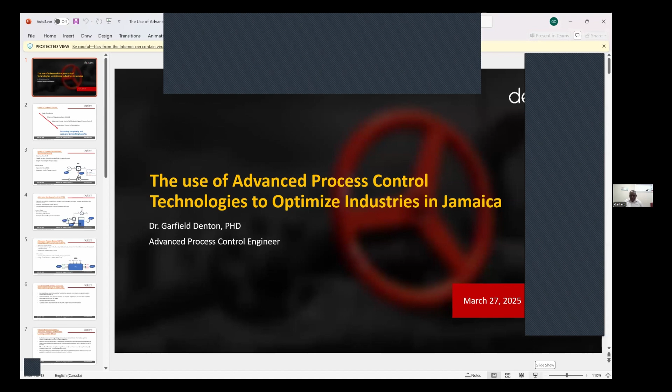Okay, so let me just share my screen. I sent a request to share. You have not been granted. Okay. Please let me know if you're able to see what I'm sharing. I am seeing. All right, thank you very much.

Yes, all right, so good morning, everyone. I'm really grateful for the opportunity to speak about the potential improvements we could see in our industries in Jamaica if we further optimize our operations utilizing advanced process control, or the layers of control above APCs.

The first thing I'll do is a quick review of the various levels of process control. It is important to understand that each subsequent level of process control is built on the layer below. The lowest level is our basic regulatory controllers. The next level is what we call our advanced regulatory controllers. Then we have APCs, and now we're moving towards constrained economic optimization. And then there's even another level above that, which will involve the use of AI and machine learning.

It should be noted that as we move up the levels, we're seeing increasing complexity, and the cost and benefits don't necessarily scale with going up each level. But the overall improvements we see in safety, stability, and financial results due to going up into the levels definitely improves. I will spend a few minutes just explaining what each level of process control gives us and what potential benefits we could get as we move up in the layers.

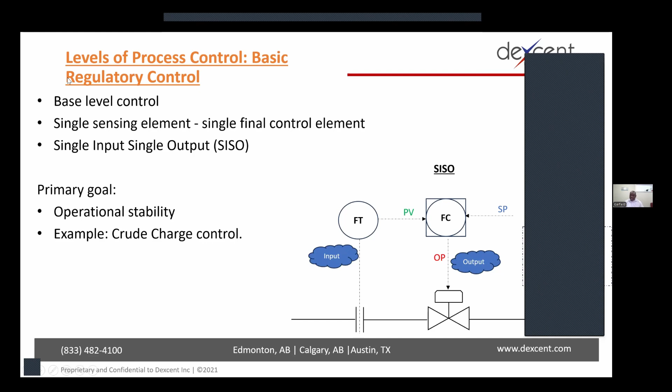The next layer is what we call our advanced regulatory controllers. These now have multiple inputs, but you still only manipulate one output device.

There are many different types of advanced regulatory controllers. We have ratio controllers, which are utilized quite a bit wherever we have mixing of chemicals, in the food industries, or making paint, or whatever the case might be, where you want to mix a number of ingredients. These advanced regulatory controllers gave us improved stability and performance over our basic controllers. Companies that have moved up from just basic regulatory controllers have seen improvements in their bottom line because of these controllers. Again, if the base level controllers aren't working well, then these ARC applications won't work properly.

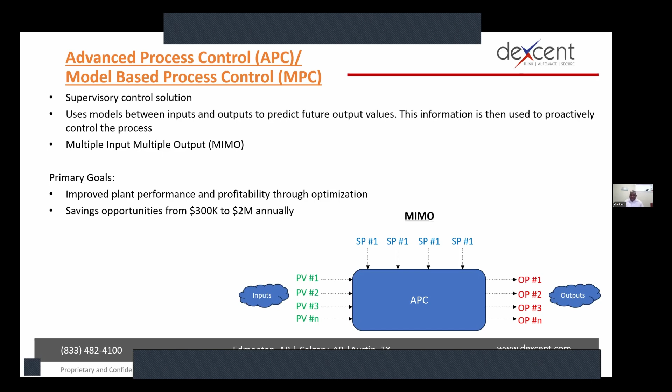All right, no problem. So the primary improvements a company can see if we implement more advanced process controls include significant improvements in plant performance and profitability, because now instead of just running to a set point, we can optimize the process and push it to the true constraints of the units. Across the world, different companies have seen various levels of savings and bottom line improvements. Sometimes they see between 300 thousand up to like 2 million US dollars annually that an APC application has delivered to the company.

I won't be spending a lot of time talking about constrained or real-time economic optimization because there aren't very many use cases internationally where we're actually utilizing constrained real-time optimization. In fact, where I work at the moment, we have a test plant where we're trying to implement one of these type of APCs. So the information and knowledge about these APCs or these type of systems is quite limited, but a lot of companies are investing heavily in trying to include not just the plant limits, but other constraints such as customer demand or inventory systems or blending systems.

So more and more of the other external things that we need to consider when we're running a plant are now we're able to factor those in to how we run our units. So instead of just always trying to run to the operating limits of the unit, if there's an external factor that has an impact, then we can consider that and adjust the unit's performance accordingly.

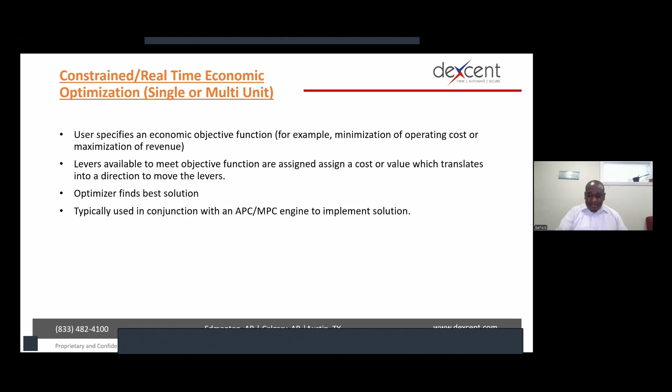This one is the one that I'm most afraid of. If you're older, like I am, and you've watched the Terminator movies, and you've seen how the world is moving towards the use of AIs, the more we develop these systems, the more I fear we're moving towards that type of situation. But maybe I'm just being paranoid, right?

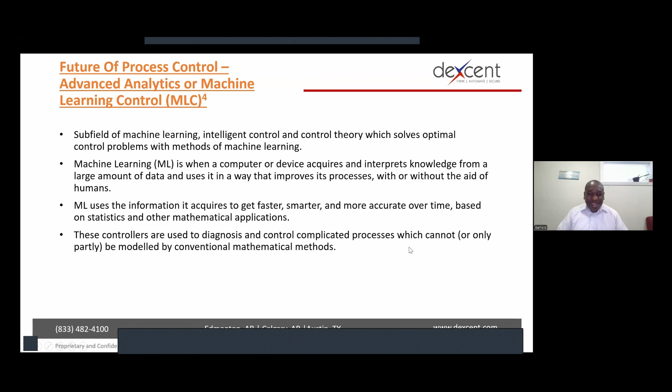But the use of machine learning and AIs, that's a big field. We have a lot of companies investing into AIs. It should also be noted that we don't want to build these systems to replace persons. However, if you look at how a person can respond to an issue versus how an application can, you get vast improvements in response times and stuff like that. But at the same time, we still need that human interaction to be able to maximize the benefits from these applications. So even though we're moving towards this, I'm very cautious, and I would advise everyone to be cautious as well.

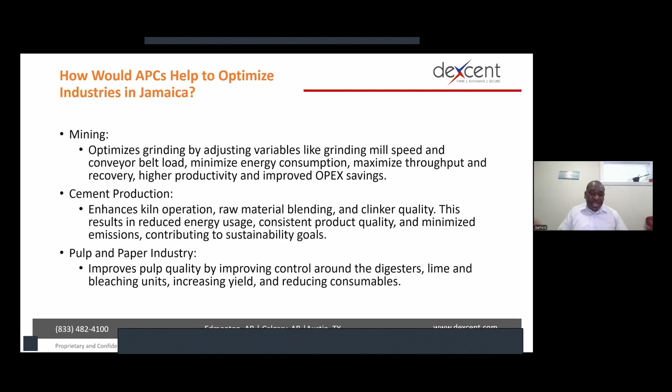I also have some suggestions for the pulp and paper industry. We could look at improving our controls around our digesters and bleaching units, and we could see an increase in yield and a reduction in our consumables.

Other industries—this one is quite close to me because I spent a number of years working at Petrojam—oil refining. If we're able to optimize our distillation units and/or furnace operations, we'd be able to push through far more barrels of oil each day. We'll be able to meet our product quality specifications more consistently. And even in hydrotreatment operations, there are a lot of APCs now built around reactor controllers. So those are some of the areas where we could see vast improvement in operations.

Also, because we're moving now towards real-time optimization, there are also applications being built that integrate our logistics into the whole operation. So our storage and blending of different products can be further improved through the use of APCs.

Minerals processing—I spent a vast majority of my professional life working at both Windalco and Jamalco. I know that we have APCs implemented, of course, but if we're able to really get these applications working well, we can see further reduction in variability, an increase in our throughput, and through the use of more soft sensors than we currently utilize, we're able to have even better control over our product quality.

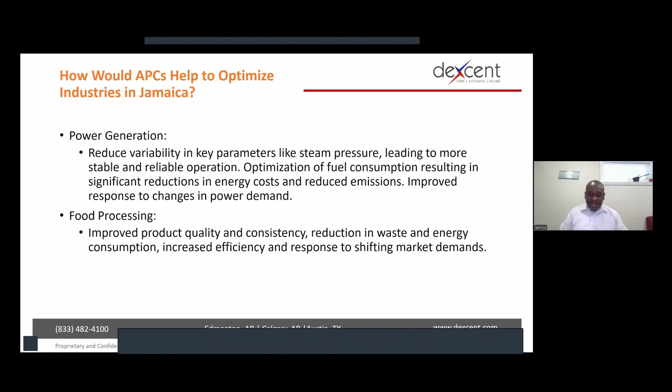Now, I've said a lot about the virtues of APCs, but there's another reality we have to face. This technology is not free, and in some instances it can be quite costly. However, the cost of implementing APCs is highly dependent on a number of various factors, and I have a couple of them listed here.

If we decide to have a custom APC, whereby we're building this application specific to our particular process...

I see Karine has her hand raised. Should I take that question or wait until the end? Wait until the end, Dr. Garfield.

Okay, right. So if we decide to go the custom route versus the out-of-box solutions, then that could result in an increase in cost.

The size and scope of the application also adds some cost. Software and licenses matter too. If we decide to do consulting, like bringing in Honeywell or one of these external companies to build the APC for you, or if you have the resources in-house to do it yourself, that can also reduce the cost of the application.

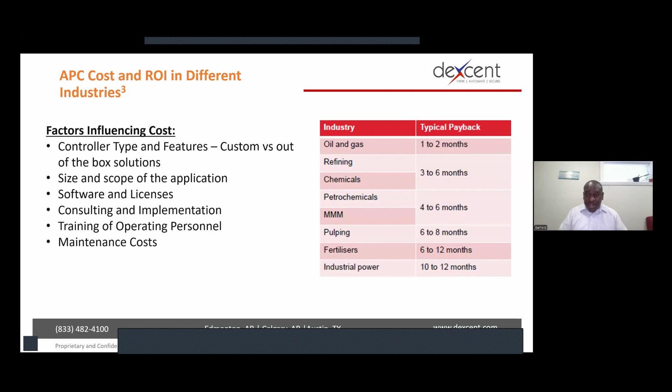The final thing I will talk about is also one of the most important aspects of APCs: what is required to actually implement an APC. So the very first step is that we'll need to justify the APC. So how do we justify an APC?

We do what we call a benefit assessment. What we typically do when performing these benefit assessments is look at a particular variable of interest, maybe the overhead temperature of a distillation column. We look at what the mean is and its current variability, then what improvements in our operations can be attained by reducing the variability in this operating parameter.

When we're building brand new APCs, we typically look at what a 50% reduction in variability could yield. So we reduce the variability by 50%, which allows us to shift the mean either up or down, depending on where we want the mean to go. That then would result in probably an increase in production or an increase in yield, and that can be translated into a dollar figure.

So when we complete our benefit assessment, we're able to come back and say, hey, within 15 months, within 10 months, within 3 months, if we implement this APC, which gives us this improvement in this operating parameter, this is the benefit it will deliver to the company on an ongoing basis. So each month we will be achieving this amount of benefits because of the implementation of the APC.

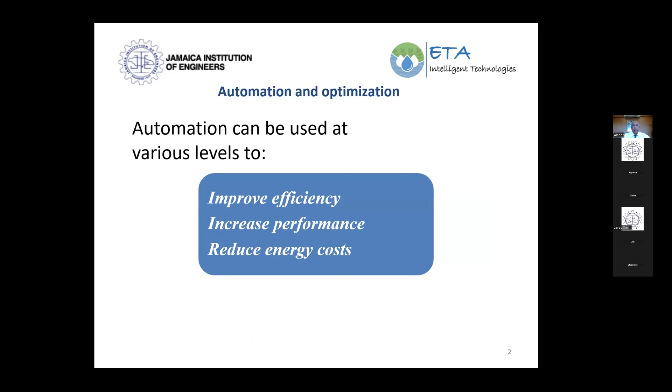So with that, I will take you through a presentation about how we use automation at various levels to improve efficiency, increase performance, and reduce energy costs.

Over the decades, we have grown up with the idea of being able to control devices and so on. Dr. Garfield showed us some simple and some complicated examples of control systems, which industry and academia have been using for decades. But now we are expected not only to do that, but to do it much more efficiently, trying to save money and improve performance with the same tools, hardware and software, but with some additional knowledge and focus. So what we need is some imagination and knowledge so that we can achieve something very significant.

If you are a fan of people like Einstein, he used to say that imagination is more important than knowledge. I kind of agree with that, but I add that in our field we need both - the imagination, and also the knowledge to be able to do something better.

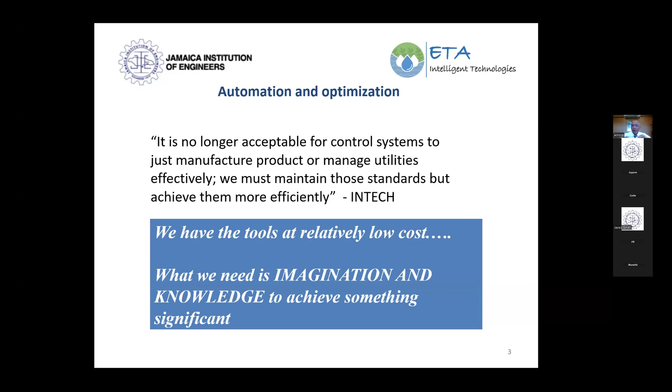SCADA data is real-time information coming off the water system, like reservoir and tank levels, various equipment status and so on with pumps, and past demand data. It goes into a mega box, and that box produces an optimized output as to how to run your transmission system, water system, in order to save energy and save costs.

The software consists of different blocks related to predicting your demand and water usage in various pressure districts within the city of Toronto. There might be about 10 or 12 pressure zones, each with a predicted demand, where we have models for doing that. We have detailed information about the cost of energy.

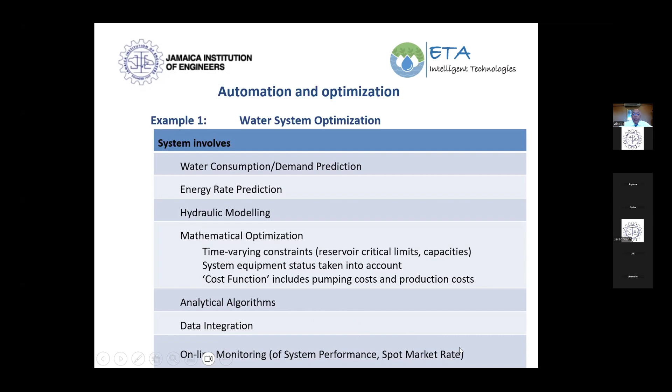On the computers we are currently running, it takes about 15 to 20 minutes to run an optimization cycle. The city has selected to run this optimization system twice a day, in the morning and again in the evening. It used to run about 3 times a day, but for operational reasons they have now changed it to twice, which is quite adequate.

The model parameters can be calibrated. You have a set of analytical equations that predict, based on the weather, temperature, rainfall events that have occurred in the last few days, and the past demand, what the demand is going to be within that particular pressure district. We have models for weekdays, weekends, holidays, for about 12 or so pressure districts.

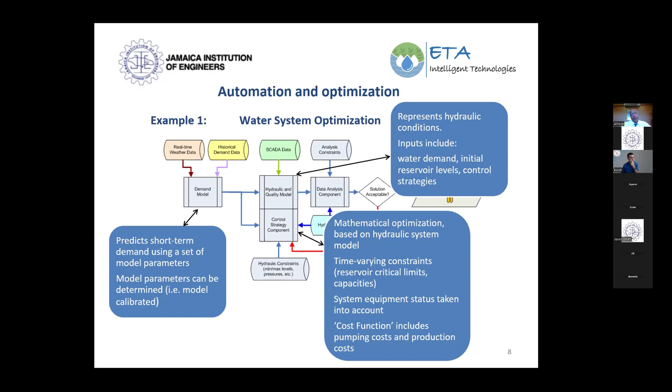In a water system of this sort, it's not enough to optimize just instantly, but you have to take into account what's going to happen over the next few hours, even a few days, because some of the rates are related to a weekly billing cycle.

We have a hydraulic model here that represents the system in terms of reservoirs, levels, and the control strategies. Then we have the mathematical part, the control strategy component, which does the optimization based on time-varying constraints. System equipment status is taken into account, very, very important.

The cost function includes the pumping costs and the production system costs. Here is the optimization itself, where we take into account the total cost, including the sum of all the pumping station costs to run it, and the production costs.

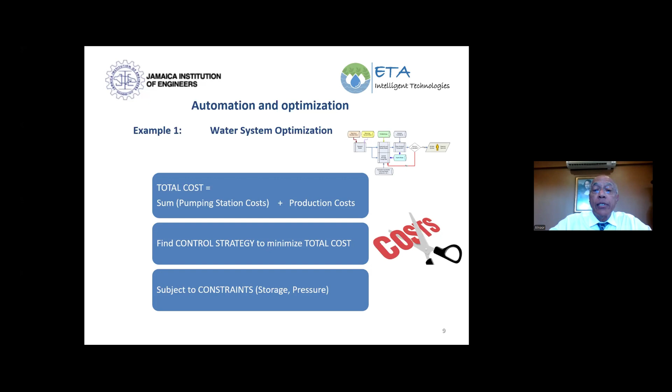In this case, the city has 4 sources of water. Each plant has a slightly different cost of production, so we can feed that into the optimizer, and the optimizer can decide to use less water from the more expensive plant and more water within the hydraulic constraints.

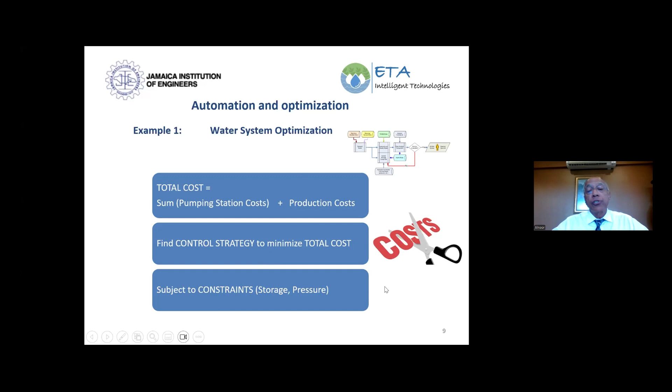So that's very useful. The control strategy then minimizes the total cost subject to the constraints, and the idea is to cut back on costs and energy use as well.

This shows an example of hundreds of results of this sort, where in the top figure you see the pumping station flow. Before the optimizer was used, this is typically how the operators would run the system, shown in the red line. There's no information they would have in terms of how to change the pumping from this particular station, from this particular plant.

But with the optimizer in there, based on the diagram below in blue, which shows the cost of energy, we have a time-varying cost in Toronto. You can see that the optimizer is reacting to that, pumping more when the energy is low, etc.

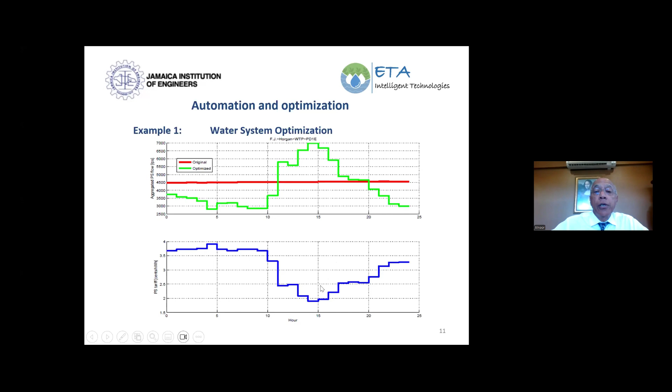And each and every station, about 40 pumping stations, behaves in a similar way. The final result was lots of money saved, less energy used. The City of Toronto has got awards from various organizations in North America based on this system.

This is a complex optimization control system, one of the most complex in the world. It takes years to build, a few months to implement, but the savings are tremendous. If one can achieve that, then that would be fantastic.

Now, this is at the very top end of optimization, what I call it. We can go into something simpler, still with the idea of using our imagination and some knowledge about how things work. This example discusses just one single wastewater pumping station.

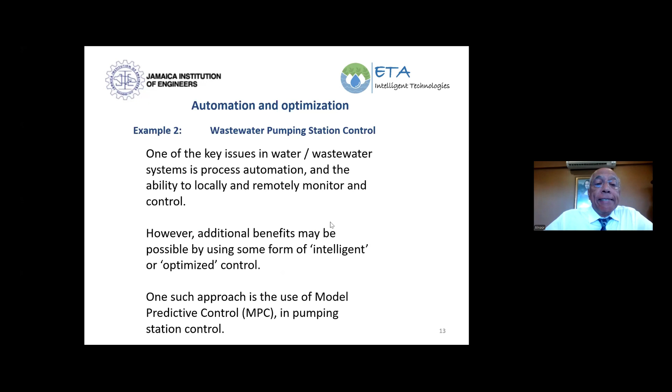Typically, the station is controlled based on pumps being programmed to start and stop based on the wet well level. We've done this for decades. Everybody does this everywhere you go in the world.

However, if you study closely some of the pumping stations, you think there's something else one could do by using our imagination and knowledge, right? So what we've implemented is what I call model predictive control, whereby the pumps not only start on the actual level as in the standard approach, but take into account a predicted level.

What this algorithm does is say that I will only start the second duty pump if the system determines that the first duty pump cannot cope with the situation, meaning the wet well level will subside if you wait 10 minutes, 15 minutes, half an hour, and you can set all these parameters. In this way, you can prevent a second pump from starting.

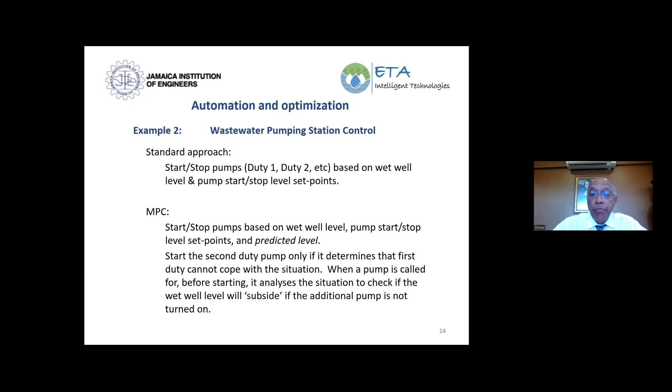For large pumps and utilities that pay heavily on a standby charge, this can be a substantial saving in costs. Not only that, but you've stopped a mega pump starting for 20 minutes and switching off, which contributes to the wear and tear of the pump.

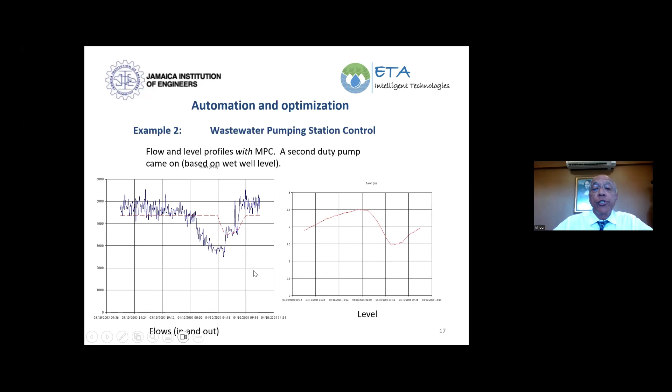However, if the algorithm finds that there's really a surge in incoming flow and the wet well is increasing, it will immediately start the second pump. No issues there. So the conclusion is that simple algorithms, with some imagination and knowledge, can be used to lead to savings in operating and maintenance costs, as additional pumps are prevented from being turned on. For large pumping stations, the savings can be quite significant.

A third example: this is a case in a system in Brazil, where they approached me to look at the control situation. It was actually quite simple, but they were not able to control the DO in these reactors.

And they found the DO was all over the place. The DO was quite important for them to control because without it, they couldn't get the proper mixing in the tanks.

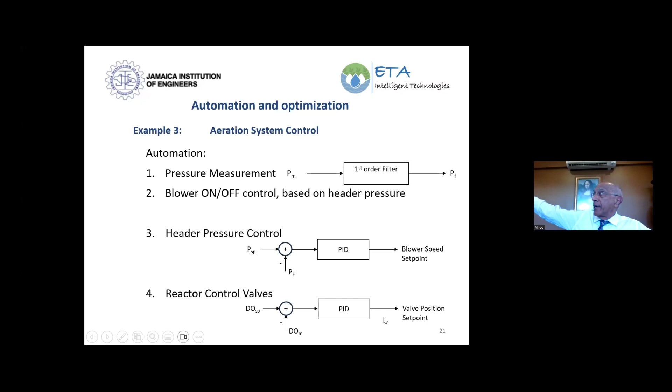And then we had the control of the DO itself based on another PID loop, single input, single output, which was just driving the valve, each valve controlling the air into the tank.

I'll go back to this diagram again. We have a loop which controls the header pressure, and the blower speed was controlled by maintaining the pressure in here, so that when other users took air out, we were able to quickly and automatically change the blowers based on how many were online and not online, to control the pressure here.

Then we had a control loop around each valve and around DO. Assuming the pressure was now relatively constant, we were able to achieve DO control by using this valve.

Now, there's an extra step one could put in if there was an issue with these DO controls, by using what the first speaker spoke about: multi-input, multi-output, but I call it a cascade loop, whereby you would have the DO measurement and requirement loop driving a flow control loop, controlling the flow around this valve.

But nonetheless, it was not necessary for this, to save on costs for extra instrumentation and extra controllers. We designed a loop which was implemented straight from DO to the valve controls.

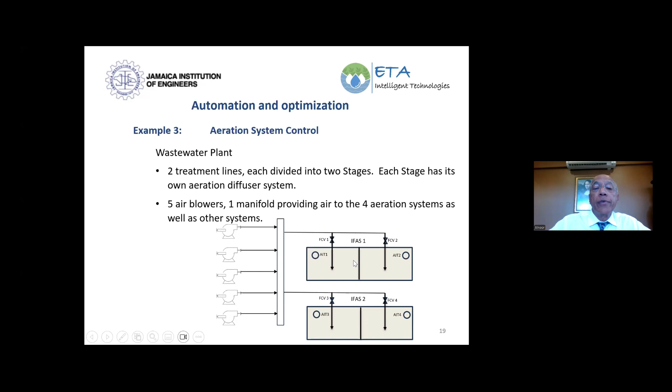I'd like to move on and talk about a plant in wastewater plant automation. This one is in Jamaica. I believe this one is at Perth in Manchester, Jamaica.

The idea is about having proper and optimal plant operation, whereby the plant is fully automated. There's not a single thing that operations has to do for this plant to work optimally and fully. The plant is based on MABRs, membrane aerated biofilm reactors, and has the usual equipment: screening, aeration tanks, secondary clarifiers, sludge management, and UV disinfection.

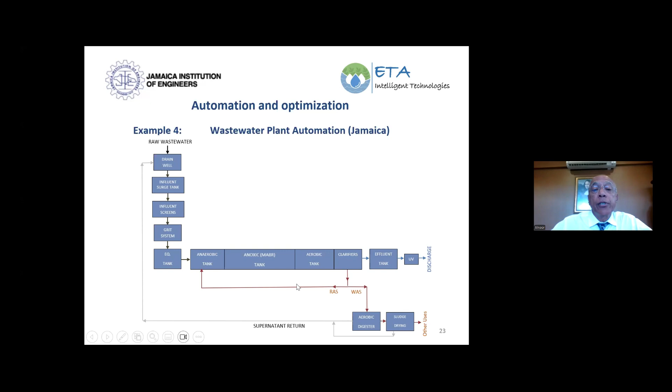But this is not my topic here. My topic is automation, so let's talk about that.

We typically program what we call mode permissives and operate permissives. Mode permissives are logic that allows auto mode to be entered; certain conditions won't allow the operator to put the device into auto mode, or the logic to do so, from a safety perspective. There are also operate permissives. For example, you might include a tank low level as an operate permissive, meaning that if the tank is at low level, the pump feeding out of the tank cannot turn on. So those sorts of protections are inbuilt into the logic.

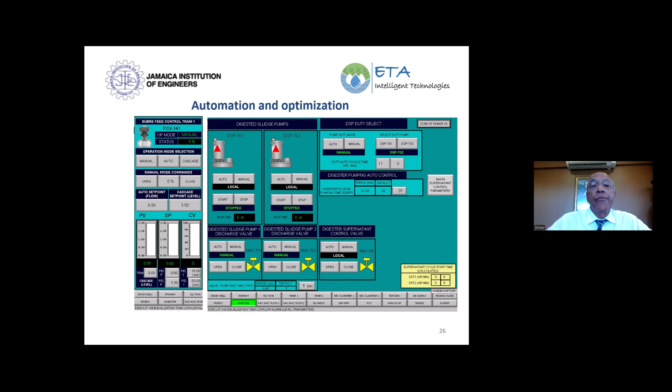This is the same plant here, showing a fairly complex sequence, completely automated in terms of sludge and supernatant control. Now, the point I want to make here is this: more often than not, including even in other countries besides Jamaica, typically these sorts of controls are left to operators.

The operators have a direction saying at 3 p.m. you'll come and waste some sludge for 1 hour, and then you'll do this and do that. Every day they have to come and do this, and sometimes they're late, sometimes they're early, sometimes something is not happening correctly, and so on.

But our philosophy is that whatever the operators can do, we can automate. It takes maybe a few days of thinking, programming, commissioning and setup—maybe about a week, shall we say. And then when it's done, it works like magic, meaning that at 3 o'clock, something will happen because it was programmed to do so at 3 o'clock.

It'll happen for one hour every day of the week, the same thing happening without changes in performance and so on. It may look complicated, but at the end of the day, it's really mimicking what an operator might have done, but more precisely and more correctly.

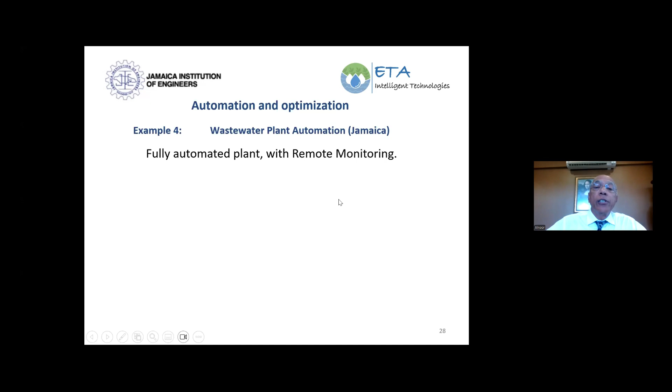The next example I want to show you is a water system in St. Lucia. It's a small island, as you will know, but its water system is distributed around the island. The terrain is not so easy in terms of hills, mountains, and narrow roads. It's quite a challenge, and there's a lot of inefficiency in terms of time of operators, cars used to drive up and look at the tanks and turn pumps on and so forth.

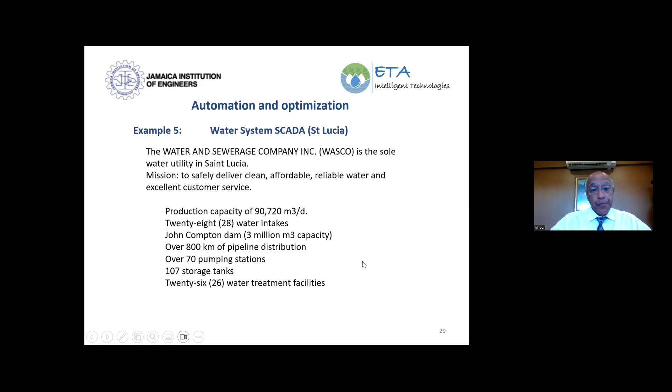So wisely and correctly, the authority, WASCO, the water authority, decided they should look into some kind of automation. We designed it, and they're in the middle of implementing this now, or rather about to start the implementation, of part of the SCADA system because of budget constraints that will automate the system.

When I was there for a couple of weeks studying the system, I knew operators having to drive every day, half an hour each way, to look at tanks and pumping stations. Once the system is in place, the same operators will be doing something else—monitoring it from their desk rather than driving and using gas. There'll also be reduced power consumption because it'll be programmed to operate optimally.

It'll optimize staffing levels, as I indicated, and eventually, once the data is gathered, they'll be able to fully support the hydraulic and water quality model. I'm personally very keen to see the hydraulic and water quality model run in parallel with the SCADA system, pulling data from it so the model can be improved, which will help improve their design of water systems as well. Last but not least is system security, because part of the SCADA system will also monitor intrusions at the pumping stations and tanks.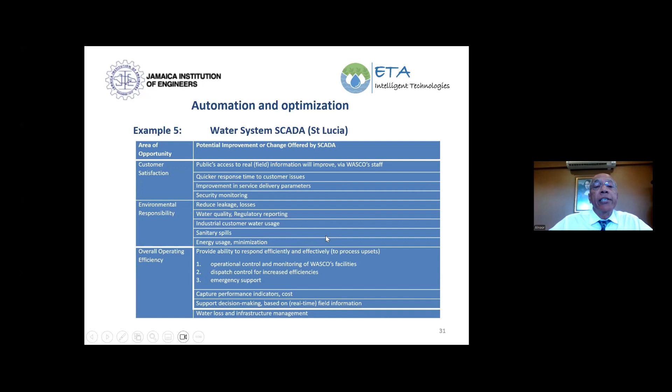The development of the SCADA system, we broke down by first looking at the requirements: what are the functional data requirements for each type of facility? What do you want to do at each water tank, at a pumping station, at the treatment plant? Then, rather than diving straight into specifications, we developed standards for all the hardware and software, so that after this project is done, the standards will be available for the next 10 years for the authority to use as they keep upgrading the systems.

We then had what we call a SCADA project delivery process, whereby we take into account how the SCADA systems will be operated and maintained. We had to review the existing system they have, since they did have elements of a SCADA system already, and plan to improve, modify, and upgrade it. This finally fed into the overall plan for the SCADA system. This picture shows, at a very high level, the SCADA system that will eventually go into St. Lucia.

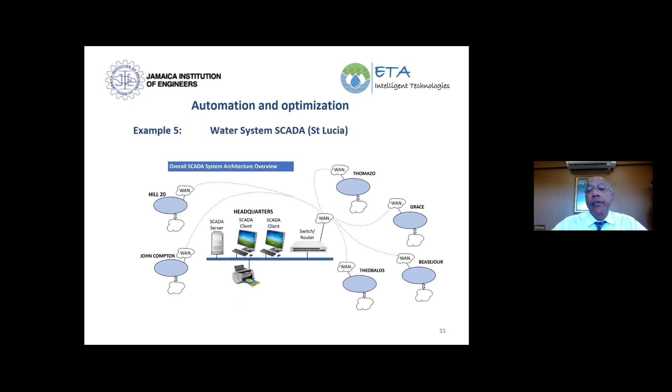Only components of this will be implemented in phase 1 because of budget constraints, but the hope and the plan is that eventually over the next 3 to 5 years, they will implement the whole SCADA system. Finally, when it's implemented, the SCADA system will be able to then not only help operations, but also help maintenance and also help with data to other departments. That is the goal.

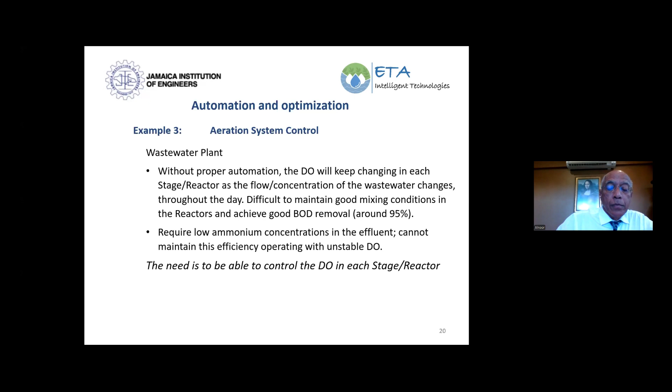Okay Dave, you may unmute. Did that answer your question? I'm going to type the answer here too. Well yes, I was just wondering if it's two models, the hydraulic model and the quality model combined in that block. Yes, it's combined.

However, we can turn on and turn off the water quality model. If the operator didn't want to be bogged down with water quality models, I don't see a reason why, because it does take a little bit of extra computation, but not a whole lot.

It's an extremely useful thing for them to have, because occasionally, depending on the weather and the heat and all that, they will begin to see the chlorine residual, what they call quality, start to deteriorate in a certain area in the city, for example. If that happens, and we see that happening, then either manually or automatically, the optimizer can start invoking reservoir cycling routines.

By this I mean, I didn't go into the details of the optimizer and the algorithms, but each reservoir has maximum and minimum limits set, not fixed limits, but profile limits. So what the algorithms can do is change this minimum and maximum limit so that they go up and down, up and down, and the optimizer tries to fill the reservoir and empty it, fill it and empty it, and they will do that, say, 3 times a week, which is something they would do manually anyway before the optimizer kicked in.

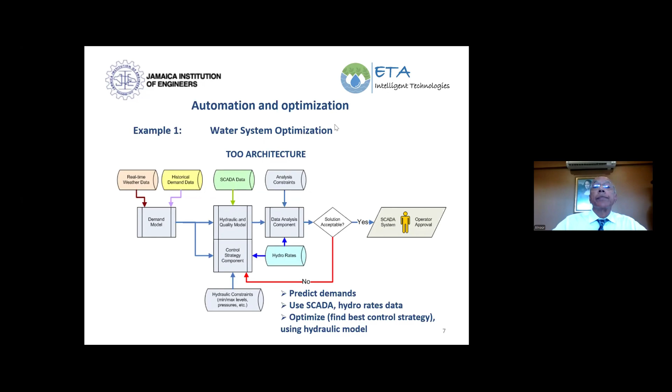Kevin, are you here? Thank you so, yeah, much, sorry Doctor, about that. I was gonna turn my microphone on. Can y'all hear me okay?

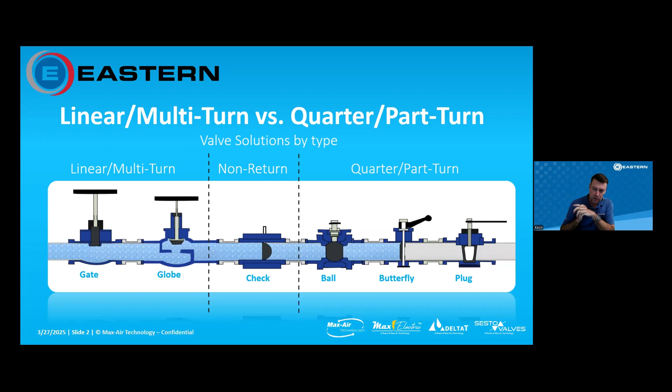So that's kind of a safety feature within the system. Like I said, there's really no external actuation required of that. It uses flow reversal to close the disc, or technically there's a spring that would have closed the disc just prior to flow reversal. As soon as the flow basically becomes stagnant before it reverses, it closes the valve.

We'll dive mostly into these quarter turn valve applications for today's session. These two are the butterfly and the ball valve. Differences here: you can see in the open position, the ball valve is a true full port opening, whereas the butterfly valve would have the disc within the flow.

Typically you would use ball valves in most applications 2 inches and under, or in larger bore pipe if full flow is required. If you have a very high flow rate requirement where this disc on a butterfly valve would reduce flow enough that it might impact the process, then you would go to a full port valve like a ball valve in this case.

You can see the disc being within the flow. Typically we use these mostly for on-off applications for isolation, although they can be used in proportional or modulating applications where tight control is not really required. It would be more something to where they're just looking to throttle flow to a small amount. If you need very tight control, there are other control valves we can discuss later that really give you much more control than this particular type of design.

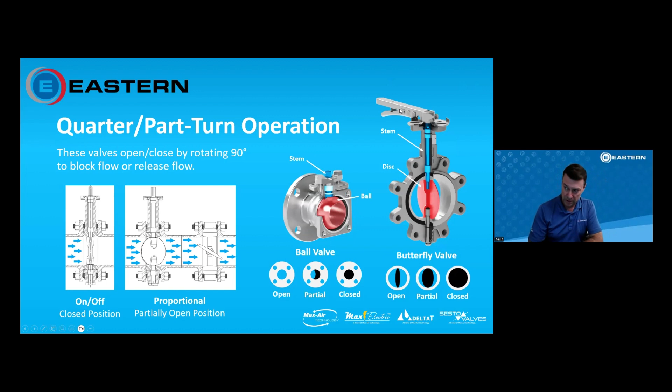Within butterfly valves, there are a couple different types. We've got what we call a resilient seated valve, or rubber or Teflon seated. These are usually general purpose applications. Being that they are rubber or Teflon lined, there are greater restrictions on temperature and pressure for these types of valves. A typical resilient seated valve you would use in applications up to about 175 PSI.

Not sure what that converts to in bar. You guys probably use more bar units than PSI. But like I said, we do have some that are rated up to about 250 PSI, but they would still be temperature limited with EPDM or some of those. You're usually looking at about 225 to 250 degrees Fahrenheit.

So if we've got applications with higher temperatures, we could go to what's called a double offset or high performance butterfly valve. That's this type of design. Those are typically offered as a standard with a Teflon kind of an O-ring seat. In this case, that design is actually made so that you can see the disc is actually in front of the stem, as opposed to what's called a concentric design for resiliency of the valve, where the stem goes directly through the middle of the valve or middle of the disc.

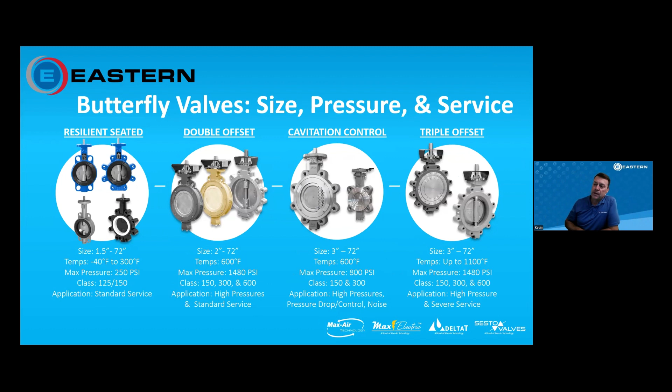This cavitation control is a unique modification of the double offset design. It's basically the same valve, but they do a contoured disc. This external seat retainer has a diffuser plate built into the outlet of the valve, and that allows for increased flow control. It'll reduce flow at lower areas, say from 0 to 20 degrees open, and increase the amount of control the customer can get, but still in a pretty compact design as opposed to globe type valves. If we were looking at a 12-inch valve, it would be very large for a globe control valve for throttling applications. This allows you to do the same thing and get similar control, but in a much more compact and cost-effective package.

Going from a double offset to a triple offset is a design advance where, as I mentioned, the disc is behind or in front of the stem. That's what we call a single offset or double offset. It's not only behind it, it's slightly off center. That double offset design I liken to an airplane door, where when opened you pull that door out from the plane and then it rotates to the side—a very similar geometry. So it reduces seat rubbing because in this case the disc is always in touch with the seat. Here, it's only in touch with the seating area really at the last 3 or 4 degrees.

Triple offset takes it one more step in that the sealing element is actually on the disc, and the seat itself is typically an integral part of the body, machined with an angle that reduces that contact point even further. It's what we call a torque seated valve, so it will only touch the seat immediately as it's sealing. In these valves, it's a full metal to metal seal, so it can handle even higher temperatures—up to 1100 degrees. Being a torque seated valve, it can create really reliable sealing in critical applications, with similar pressure ratings to high performance but increased temperature ratings because it's usually an integral seating within the valve body. The disc seal itself can be made of several different combinations depending on pressures and temperatures of the application.

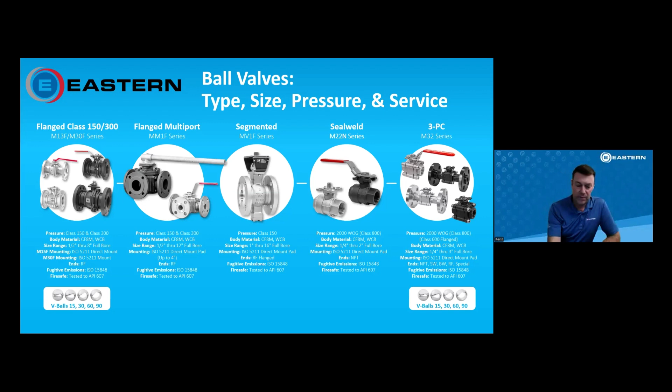Just a little bit more into the design of the valve. As I mentioned, there are multiple end connections between flanged, threaded, socket weld, and butt weld connections. That's typically end user driven—sometimes contractors like to use threaded valves, or sometimes they prefer socket weld.

Sometimes it's customer driven. Flanged end valves are typically easier to replace entirely because they can be unbolted from the line. I shared this to show the overall build of a particular valve.

This seat here, item 15, is the sealing element that seals against the ball in a ball valve. And then you've got body seals that help seal between the center section and the end connections of the three-piece valve.

We can do a variety of bill of materials here. In this case, we've got a stainless steel body and a carbon steel body. Other than that, the materials would be very similar. But if you've got more corrosive media, you'd go to a stainless steel valve, or it's driven by the piping material. If it's built with carbon steel piping, they'll typically go with a carbon steel valve.

This shows a bit more about the ease of maintenance with a three-piece design like this, where you don't have to remove the end connections from the valve. So a welded-in valve can still be repaired — it doesn't have to just be cut out and a new valve welded in place. This allows you to change out these seats and seals, and then put it back in line.

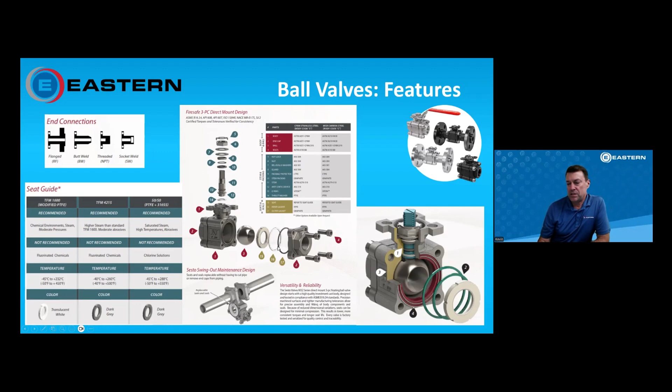Now, a bit into the actuation side of valves. We've got anything from a very basic manual operator, in this case a lever handle, or a gear operator. We typically see lever handles on valves 6 inches and below, and 8 inches and above tend to go to gears, though that's a little fluid depending on user preference. That's mainly due to torque — as the valve gets larger, there's a lot more operating torque to close it, especially under pressure.

This is a unique application where we've got what's called a limit switch on top of this lever handle. That's there to provide a control system within the plant, giving an actual indication back of whether this valve is open or closed. There's a switch in there that makes contact depending on the valve's position. That becomes critical in some cases — if a certain valve is open, operators need to know that, and it sends that signal back to the control system.

Other rotary actuators we'll touch on today are pneumatic actuators, which are air operated. Any plant with a compressor will typically run pneumatically operated valves in most cases, and pneumatic actuators are typically faster operating. Then we can do electric actuators, which are just an electric motor operator. Those tend to be slower than pneumatic actuators, although some are fast acting — but in general they're slower, running from full open to full close typically anywhere from about 30 to 90 seconds, depending on the size of the valve and the motor.

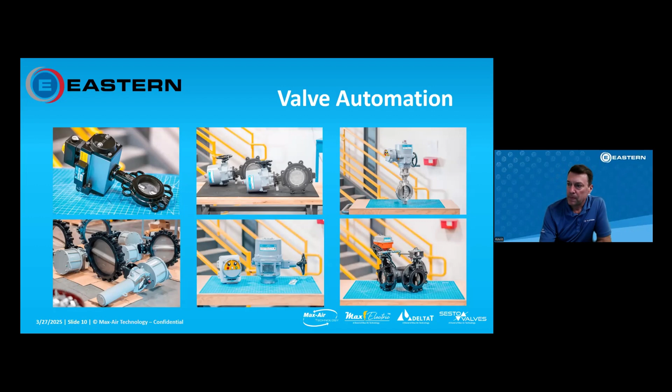A little bit more into pneumatic actuators. There are a couple different types. We've got our pneumatic rack and pinion design, typically for smaller actuators and modest torque outputs. Then there's the Scotch yoke type, this orange one here, meant for much larger valves. It's got a different torque profile that creates more operating torque at the beginning and end of the stroke, whereas the pneumatic rack and pinion is a pretty constant torque output.

For ball valves, rack and pinions tend to be really good because the ball is in contact with the seat the entire stroke, so the torque profile is pretty steady throughout. For a butterfly valve, a Scotch yoke can be better, especially in larger bores, because most of the torque is really just at the end, especially in a high performance valve, where it's just when it's seating that most of the torque is needed to create that seal and get the valve into the full closed position.

Again, these are air operated, so you're using compressed air. With the accessories they come with, we typically use filter regulators to regulate not only the pressure inlet to these actuators, because some of them are pressure sensitive. They could be rated up to about 150 psi inlet, or some of the Scotch yokes might be rated down as low as about 80 or 90 psi inlet. Any more than that could cause damage to the actuator. So we regulate those, and we usually use a filter as well to ensure the compressed air coming in is clean and doesn't introduce water or debris inside the pneumatic piston, which can cause wear and damage.

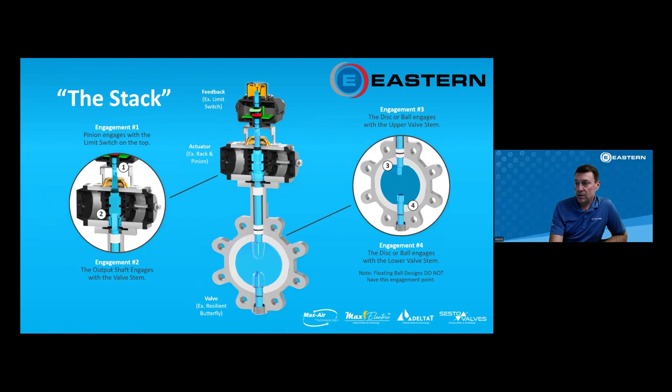We can also do these in what's called a spring return feature, which provides a fail safe. It could be either fail open or fail closed, with springs within the housing, in the end caps, that allow for a fail position. In that case, you would only use air to stroke it in the opposite direction. So if it's fail closed, that actuator would be what we call air to open and spring fail closed. A lot of plants use that because they want to ensure that even if they lose compressed air, the valve would be in its normal position.

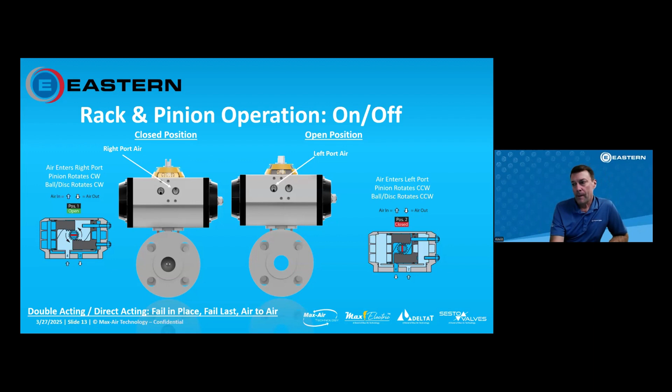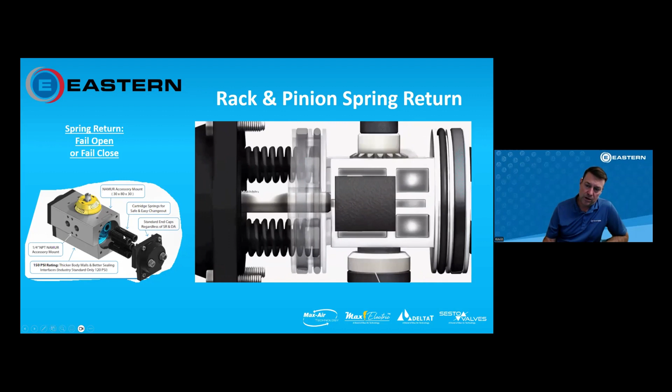You can see a better view of these spring cartridges. These are actually self-contained spring cartridges, so they're very safe to deal with. They're kind of preloaded here into a cartridge, very easy to change out. You can add or remove springs. They typically take up to 6 springs per side, depending on the amount of valve torque that's required to close or open the valve.

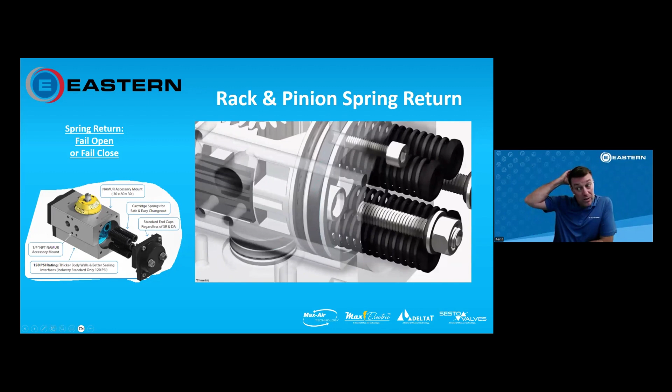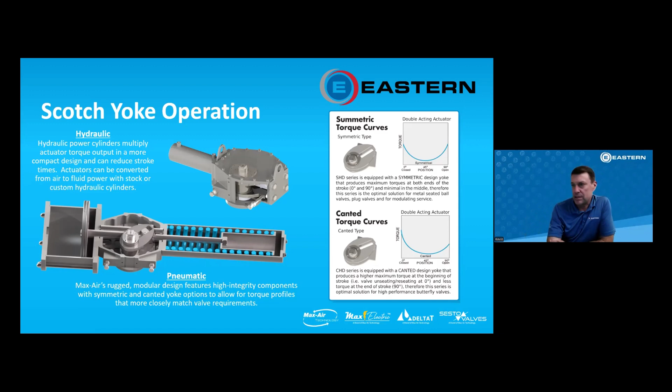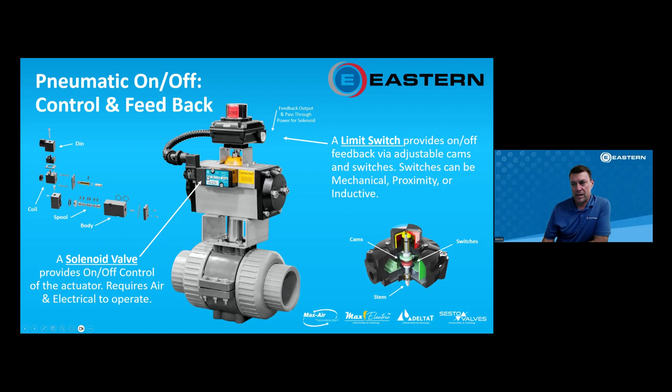This is a breakdown here of the solenoid valve itself. That's the spool valve inside that slides back and forth based on the coil being energized or not, and that's again what directs the air into the proper side of the actuator to stroke it.

Again, we talked about isolation applications where you'd typically use a limit switch for just open and closed indication. In this case, this would be a positioner that accepts a 4 to 20 milliamp control signal, which could vary—4 milliamps as closed and 20 as open, or an inverse signal where 4 is open and 20 is closed. That allows you to go anywhere from full open to full closed.

You could give it a 12 milliamp signal, which would be 50% open. So this is used to throttle a valve. If you have a process that requires varying loads of media, you'd typically have a downstream flow meter measuring flow, or process instrumentation saying you need a certain number of GPM of hot water to get the batch to the proper temperature. These modulating positioners allow you to modulate that flow and control it through the valve to a very precise level, controlling process conditions very tightly.

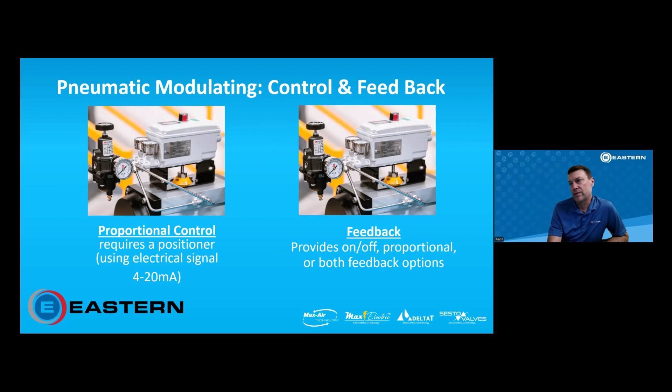Now onto electric actuators. Obviously, these are motor operators. We're seeing the industry shift more and more away from pneumatics to electrics—they tend to be a lot more cost efficient. Pneumatic actuators require compressed air all the time, whereas electric actuators don't consume any power unless they're actually being operated. So it can stay in a steady state and not consume power until the next time it's energized to stroke the valve to another position.

These are powered by an electric motor instead of pressurized air. You've got a gear train inside, your limit switch sets, and typically some additional auxiliary switches, which can control different things within a plant. You can have an auxiliary switch trip to tell the system to turn a pump off or on. Typically, a little before the valve is closed, you'd want an auxiliary switch to trip a pump off, so the valve isn't closing against a running pump, which can create problems—you can deadhead the pump and cause damage. So typically they'll set that auxiliary switch 5 or 10 degrees from fully closed, so as the valve strokes from open to closed, it kills the pump prior to the valve fully closing.

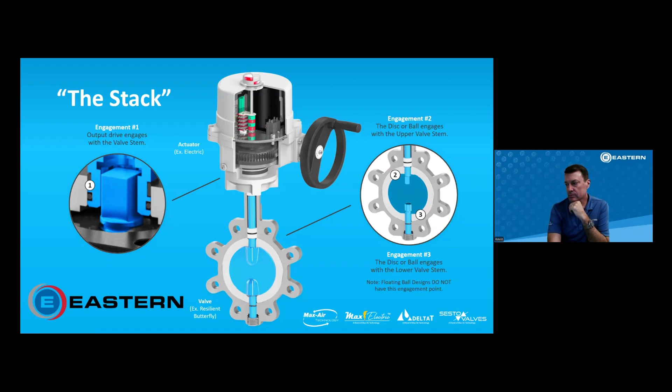A little more on motor operators. We've got conduit entries here that allow the plant to bring in all their electrical wiring. There are terminal strips inside where they connect. It also allows for feedback in cases where that's required. This is just basic power wiring—current enters, drives the motor until it's open, and does the opposite when the motor is energized again.

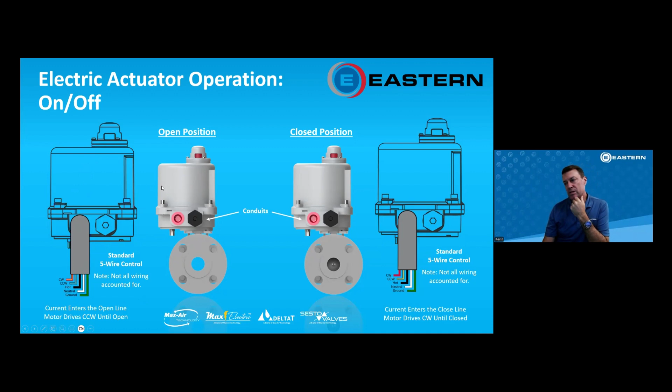Again, just the setup of an electric motor. Most of these motors will have a hand wheel override too, for cases where you either lose power or need to drive the motor to a specific position. Most motors are what we call fail-last-position. There are some, which we'll get into in later slides, that are what we call fail-safe, which provides a fail-safe response on loss of power.

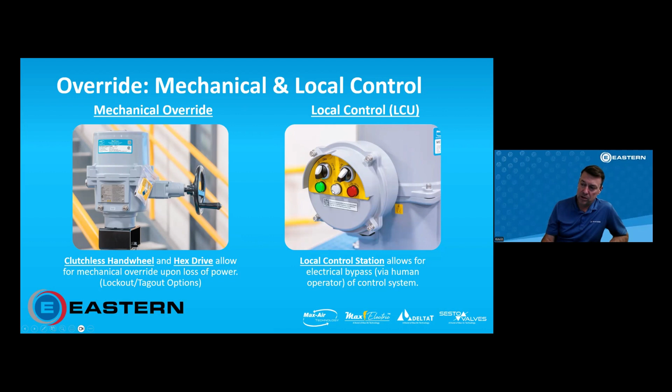So again, there's the manual override, and then a local control unit where you can put this in local or remote. It gives local indication of the position, whether it's fully open or closed. It's also got a power LED that'll just show that the unit is powered.

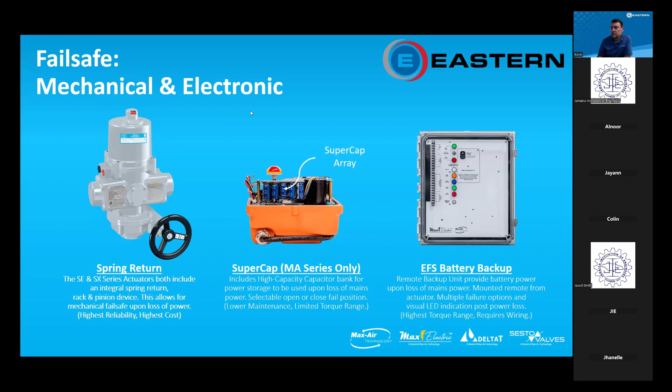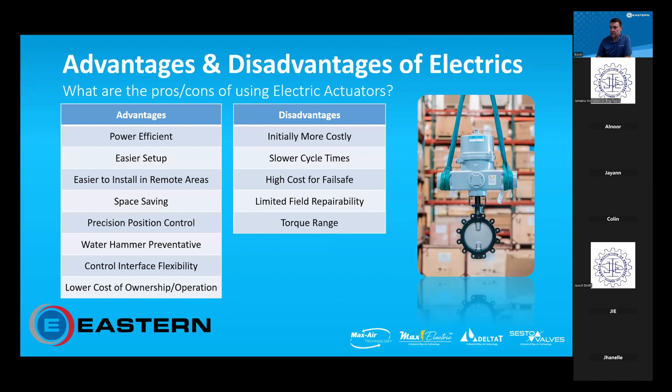Kevin, are you speaking? I'm sorry, were you speaking? Yes. We stopped hearing you. Oh okay, I'm sorry. Yeah, I'm not sure what happened. We're no longer seeing the presentation. I can just share it again here. Okay cool, okay, now we're back on. I'm not sure if this is having a mind of its own here today. Let's see here, I think this is...

Okay, well, getting into more of the mechanical electronic fail safes, we've got a spring return motor operator fail safe. You can kind of envision it's kind of a motor operator on top of a rack and pinion design that provides a mechanical fail safe. These are used typically in kind of critical applications where a plant loses power and the valve is in an open or closed position. It can cause some fairly catastrophic damage or real critical process problems. They can use these mechanical fail safes. These tend to be somewhat limited in torque output, so depending on the size of the valve, it may or may not be an option.

Some newer technology, the SuperCap series, or SuperCap failsafe, is actually a capacitor bank within the housing itself that is charged up when the unit's powered and stays charged, and it provides enough power that upon power loss to the motor itself, it would have enough power to drive it to a preset position. So this MA series here that's shown, it's kind of an intelligent actuator, and you can actually program it to go to a preset position upon loss of incoming supply power, and it would use that energy from the capacitor bank to drive that motor to that desired position.

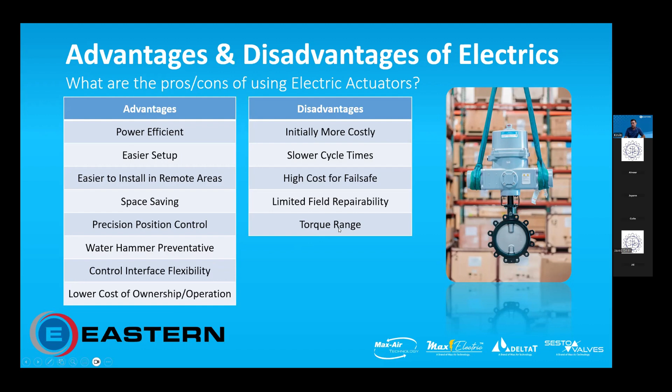Disadvantages: if you needed a fast cycle time, maybe in air applications, pneumatic operators are much faster. Pneumatic actuators are much more cost effective for fail-safe applications. These spring return electrics can get fairly pricey. And then, of course, there's a kind of limited torque range for electrics.

This is again just an overview. We've got the Intelligent series, which comes either in a standard or that fail-safe with the supercapacitors. We've got kind of our standard heavy duty unit for ordinary locations, and then hazardous duty, which would be in areas where there's explosive dust or gases that could be in a confined area.

Sometimes those require what's called class 1 div 1 area classification ratings, where these housings are rated and sealed to not allow any electrical output from the unit, like sparks or fire of any sort, that could cause an ignition in a hazardous area. And then again, the spring returns are available in both ordinary and hazardous duty as well.

This goes more into the same thing, but talks about torque range. These torques are rated in inch pounds. You can see the smaller intelligent units rated only about 1,700 inch pounds, which is fairly small, and we can get up into about 40,000 inch pounds in some of these heavy duty units. The spring return units, like I mentioned, are somewhat limited because of the mechanical spring return, up to about 3,500 inch pounds.

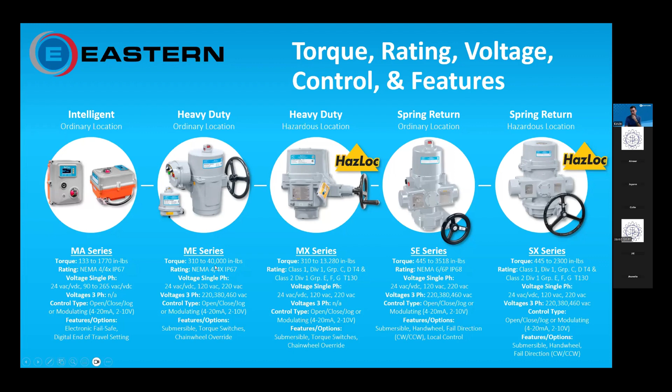Selection criteria, things you have to consider when selecting motors. Temperature ratings - they have a pretty standard temperature range, but in certain areas you might need kind of an Arctic package for very low temperature items. Sometimes we see really high temperature applications, maybe in damper tunnels where the temperature can get up to a couple hundred degrees, and you'll need high temperature seals for the housings so those rubber seals don't degrade from temperatures.

You need to consider the location, whether it's a standard or hazardous area location. And like we mentioned, do you need fail safe? If you lose power, would you need it to automatically close or open?

There are some options there, and then it's into the control functions - do you need it to be just open close for isolation, or do you need it to modulate? The rest, like Modbus and some of these other ones, we'll talk about briefly. I'm going to touch on some of the control systems that are out there.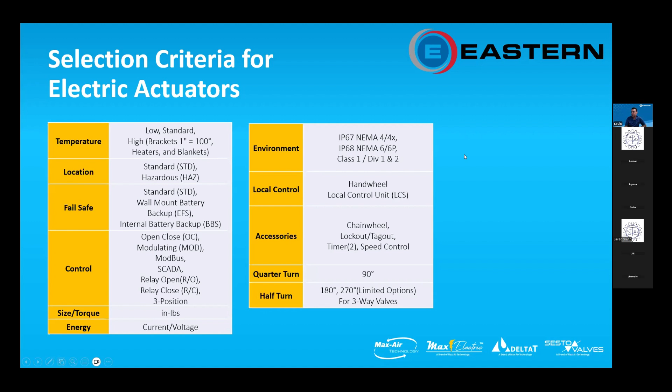This touches a little bit on network communications. In larger plants, like some of the bauxite mines down there, you may have a control system that uses these process control networks to communicate with a number of these different units throughout the plant, so that from a central control station they can both control the valve and get feedback. They can get data logging, so they know if there's problems with the valve, that it's not performing, and they can get a lot of information and process control back through these systems.

So basically there are different systems - one's called AS-i, another called DeviceNet, Profibus, and then Fieldbus, Fieldbus Foundation. We'll just touch on those a little bit. There's a lot that can go into these control systems, but just being aware that there's a lot of different control systems out there, and it depends what a plant is typically built with as to what they might be using within each plant.

So this goes a little deeper into AS-i and some of those - it's a fairly simple control system. It basically gives you very basic control. AS-i is good because it requires a lot less wiring than some others. It's a very simple system, but doesn't provide as much complexity or feedback. There's really no data logging capabilities with it.

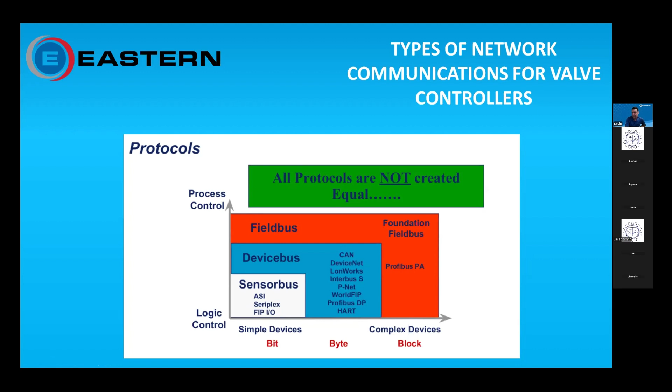Then really the most advanced system would be your Fieldbus Foundation and Profibus PA, which allows you to do a lot of different things, including data logging features, and you can actually do analysis on valves that can predict failures in some cases. If it sees valve torque increasing, it can warn you that there could be a problem with the valve because the torque has gone up 20 or 30 percent, and that can allow you to address issues before they become a problem.

A little deeper dive into some of the different features as far as what's required. Some systems are 2-wire control, some are 4-wire, meaning how much control wiring is required for these different systems, and how much power each one consumes. There are also sometimes limitations on maximum run distance from a controller, and the number of devices it can monitor at one time.

Some of these have diagnostics. The Field Bus Foundation is the best at being able to do predictive analysis on your valve packages to know whether there are possible failure issues. That's really the most advanced option.

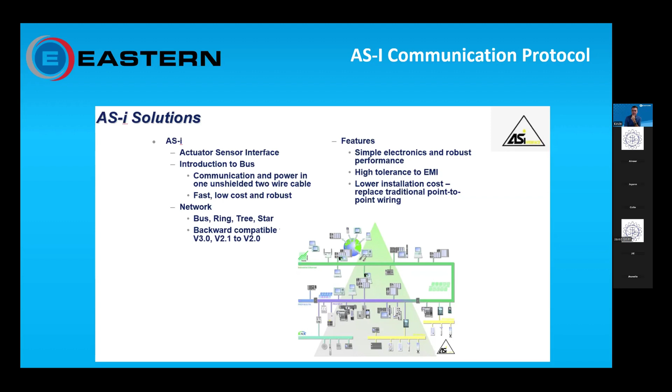AS-i itself is a pretty simple system. It can work on some different network types, and like I said, it has a pretty low installation cost compared to others—not too much more than typical basic discrete systems—but it does give you more simplicity in use.

DeviceNet, just a little overview: it gives you some diagnostic features and alarms that can give you warnings and more insight into the system. It also gives a bit more visual indication with open and closed LEDs, and the wiring is still fairly simple.

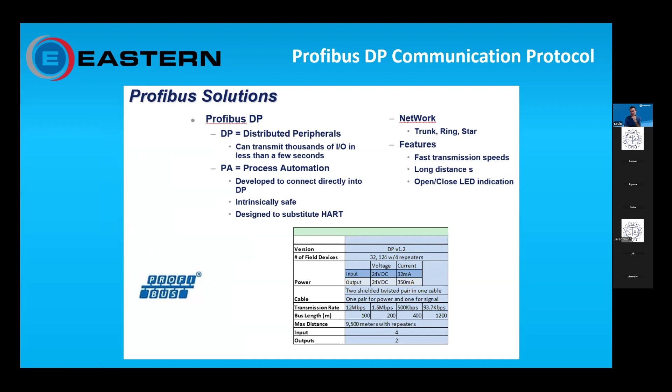Profibus is much more advanced. It can transmit a lot of information back and forth, and it's typically used for larger systems where you've got a number of units on it. It has a pretty fast transmission speed, so units can be very responsive to changing process conditions.

HART is a pretty simple communication protocol that integrates well with a lot of different control systems. Delta V is a very common open-source control system, and it works very easily with HART. HART units actually have a wireless communication device you can use—you can be locally at the unit and control it through a handheld device, kind of like a garage door opener. It's a very small, almost key fob type unit where you can open and close a valve with a simple device.

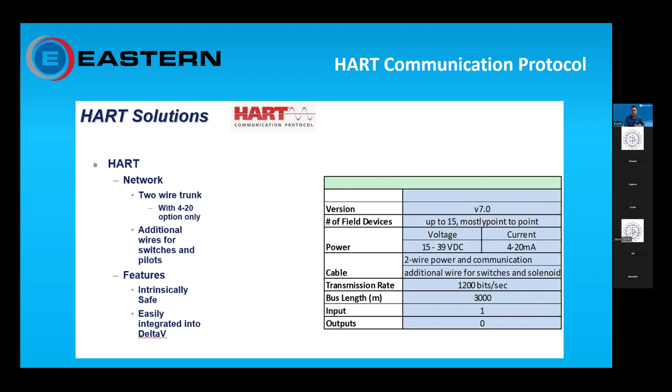Feel free to share this—there's a bunch of technical information available. One of our main manufacturers, Max-Air Technology, whose product I focused most of this presentation on, has a lot of good technical information, including CAD files for drawings that can be dropped right in to include the complete schematic of a particular system. There are also a lot of technical brochures, plus some unique FAQs and case studies showing solutions we've developed over time to help identify good solutions for your process.

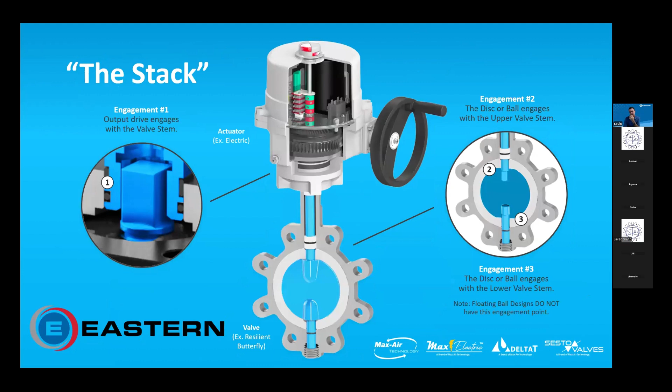I was just going to ask about the best applications for ball valves and butterfly valves. They can be used somewhat interchangeably. A lot of times it comes down to flow rate requirements. If it's a very small pipe size, say 2 inches and under, a 2-inch butterfly valve with the disc in there would restrict flow, and that's sometimes not desirable.

So a lot of it's designed around maximum flow rates. But when you get over 2 or 3 inches, a butterfly valve becomes a lot more cost effective. If it's not a real issue with a little bit of restriction in flow, then the butterfly valve becomes much more economical. You can imagine a 12 or 16-inch butterfly valve has got a very thin profile, whereas the same thing in a ball valve would be much larger.

If you did a flanged valve like this, a 16-inch valve, that would weigh about as much as a small SUV. I mean, they're very large. I've seen 24-inch ball valves that were certainly as much as a full-size truck, weight-wise.

So some of those can be, so a lot of it's required on that, or it could be a temperature requirement, because we typically are using Teflon seats that are good to about 450. Whereas a resilient seated valve may be temperature limited, unless you go to a Teflon seat like these, or some high-temp seats that are good to 300. So there's a few variables that go into it, but line size, bore size, and flow rates are kind of the main factors.

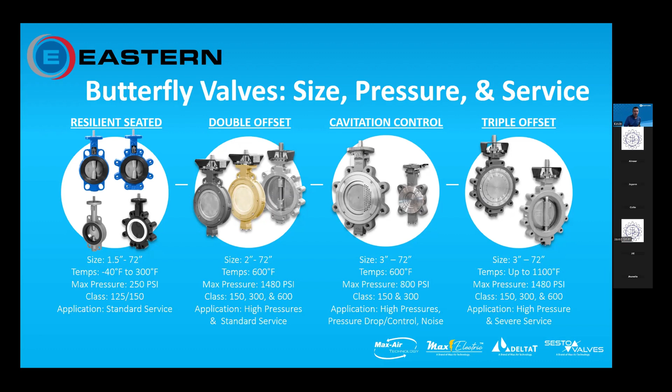For abrasives, I would tend to go with a metal seated valve, typically a segmented valve that doesn't have a cavity, so it's designed to cut through and handle slurries or different media. There's also another valve type called a pinch valve, which has a rubber sleeve running through it with a pinching mechanism that closes down on the valve. We actually use that in a lot of slurry applications. I know, for instance, Jamaica has a number of those, as does Windalco, that use a lot of pinch valves. So there are different types out there we didn't touch on, but in this case I would not typically use a butterfly valve in something with a lot of abrasive media or something viscous. I would go with a ball valve or a segmented ball valve would be better.

Okay, thank you so much.

Okay, we keep going. Are any of your control valves designed to be able to purge the process material away from the valve packing area?

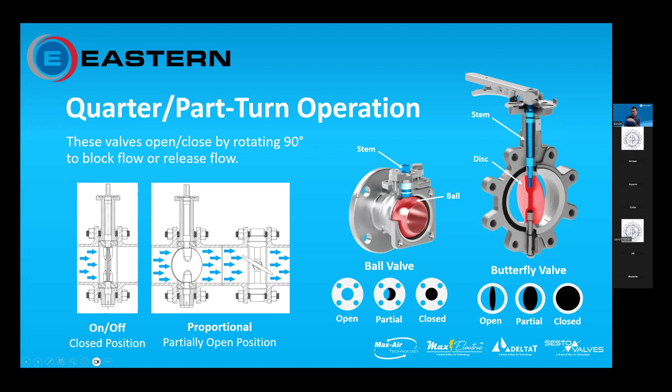Typically they're going to be sealed enough that you should not have much media actually drive up in there. You've got a thrust washer and a packing seal that would prevent media buildup. If you're starting to get media up into the stem area, then that valve needs to be rebuilt to prevent that. They've typically all got an upper and lower set of packing to help prevent leakage to atmosphere. There are some cases where we can do what's called a fugitive emission bonnet on top of this valve, or a sensing port that would sense if there's pressure or media buildup within that intermediate area, giving you a warning that you've got a lower stem packing failure. So this is important — all these designs have seals up in the stem area to help prevent media from going through.

Okay, thank you so much.

Karine, does that answer your question? It's a series of questions — here are all the different thrust washers and packing that come down through the stem, and the O-ring there that helps seal it off.

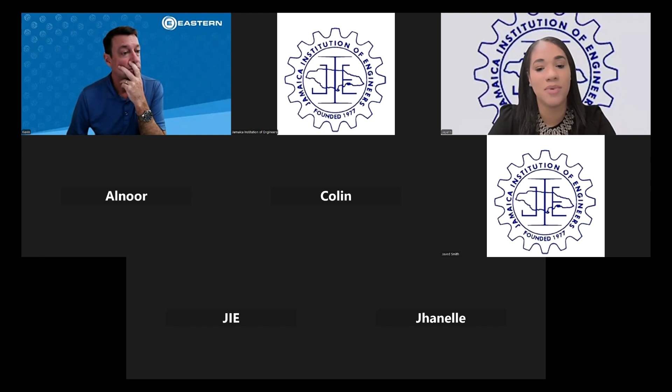Thank you so much. Thank you very much. Thank you. Thank you.